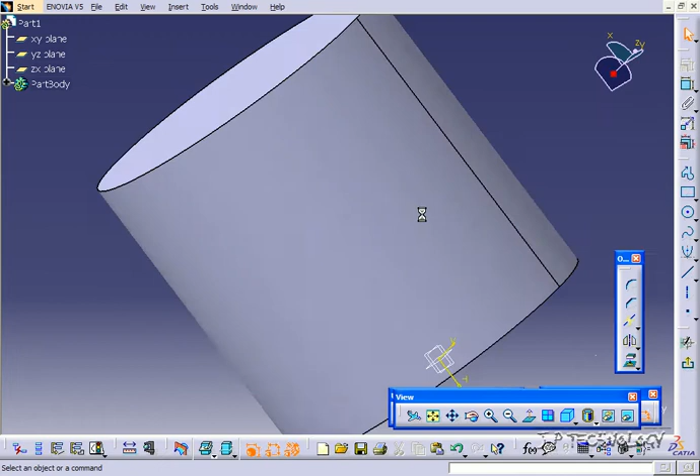So let's click on the ZX plane, and let's click Sketch. And what we're going to do is make our first sketch. So let's make a circle. Actually, first, what we should do is extract these edges. So click on an edge, click extract, and now we have edges at the two sides here. So now let's click circle and make it run across the middle here. So now let's draw a circle.

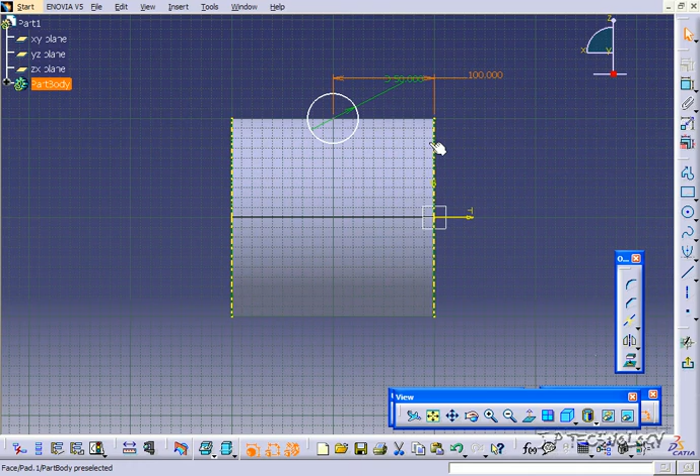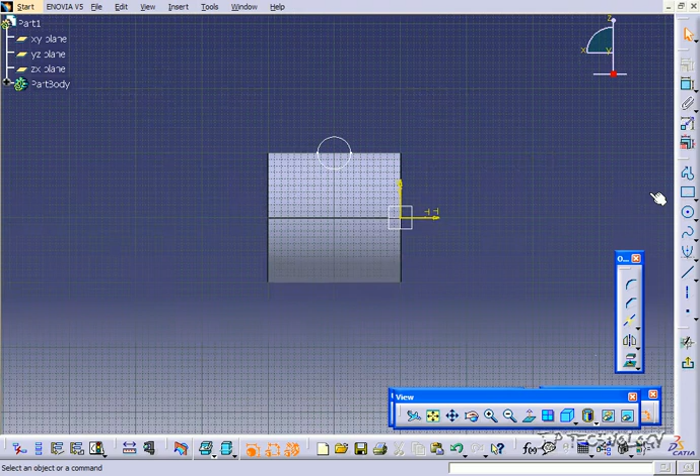Let's dimension this to 50. And from that end there, let's make it 100. So it's right in the middle. Now let's delete these lines we just made. And let's go out. So now we've created the profile that we're going to use for the groove. Now let's click the ZX plane again, click Sketch, and just draw a line down the middle of the cylinder.

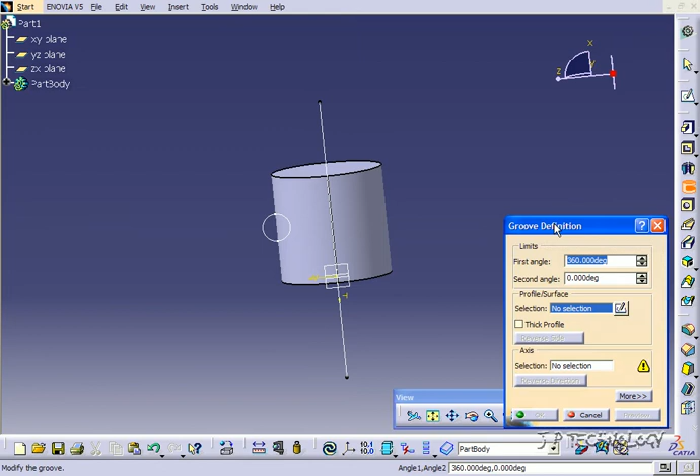And this is going to be the axis that we're going to rotate it around. So let's go up. And now we have our profile and our axis, and now we're able to use the groove tool. So let's click Groove, and we have the groove definition box here. So what it's going to ask for, like I said before, is the profile and then the axis. So let's click the profile we want, and then let's click the axis we want. And now it's going to give you a preview of what it's going to do.

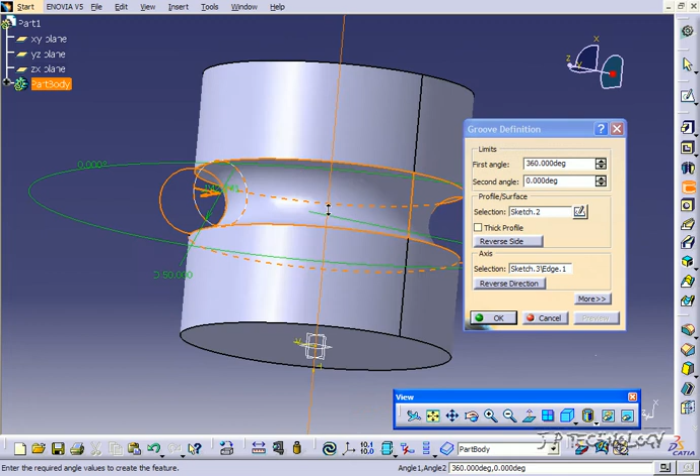So let's click preview and actually see it now. And it's going to cut all the way around with the circle. Let's click OK. And now we've made a groove around the cylinder. Now let's open the part body, double click on groove, and let's play around with a few of the parameters again. So like the other one, you have the first angle and the second angle.

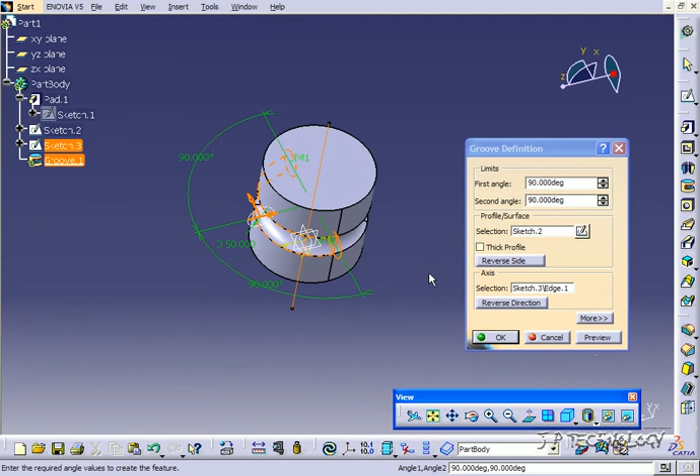So the first angle is going to be going one way, and the second angle is going to be going the other. So let's type in the first angle, 90, click preview, and you can see that it's going 90 degrees that way. And if we do 90 on the other way, click preview, it's going to do 90 degrees going the other direction. So let's click OK, and now we've gone halfway around. Now let's double click on the groove again, and let's make it go 360 for the first angle and 0 for the second.

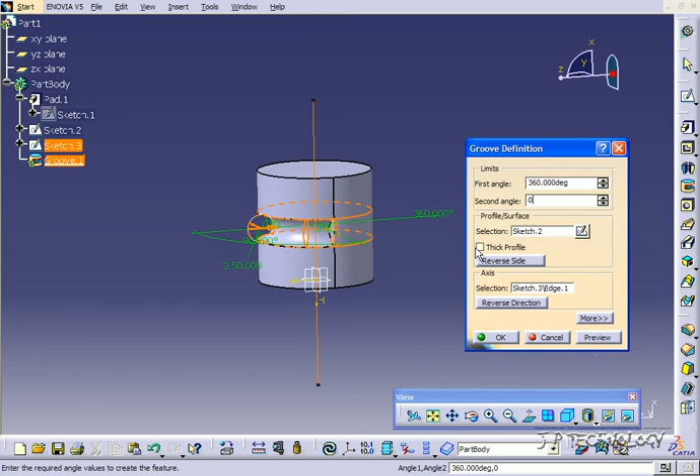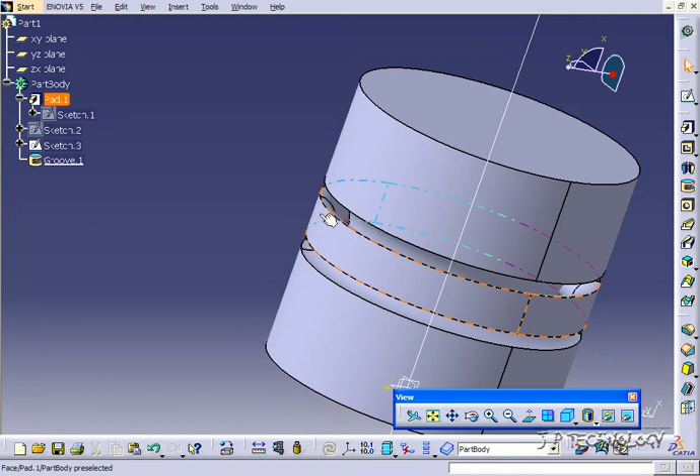And what we're going to do is create a thick profile. So let's click thick. And just like the other times, if you zoom into the sketch you made, you can see as you increase the thickness, it's going to increase the cut. So let's make this 10. Click OK. And now we can see that we've cut the groove around with the thickness tool with a thickness of 10.

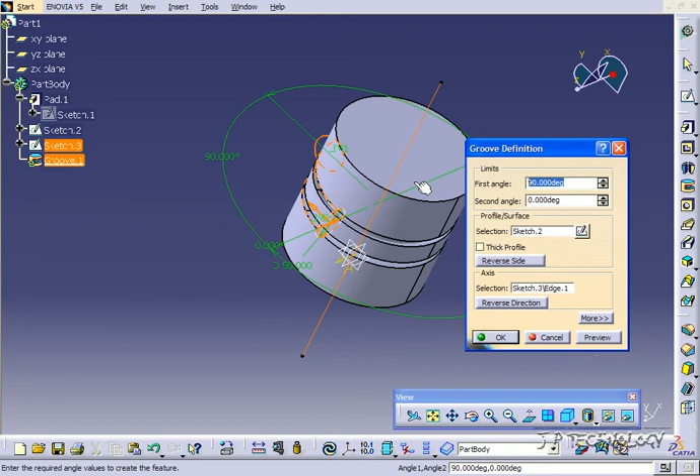Now let's go into it one more time, and let's take off thick, and let's put this to 90 and click preview, and you're able to reverse the direction. So let's reverse the direction, and all it's doing is changing the first angle, which side it's going to be on. Now let's make it do 360 again, and let's click OK.

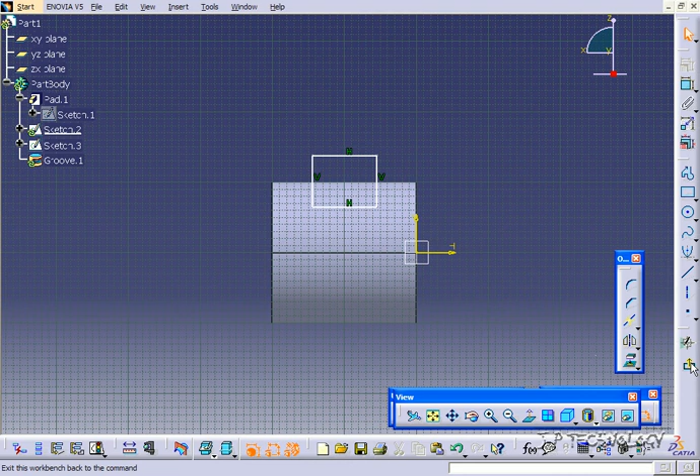Now let's click on Sketch 2, and let's double click on it, and this is our profile. So let's change our profile. Let's draw a square around it, and let's delete the circle. And when we go to click OK, it's going to rebuild, and we're going to have the square instead of the circle. And you can see that we have the square cutout groove all the way around rather than the circle.

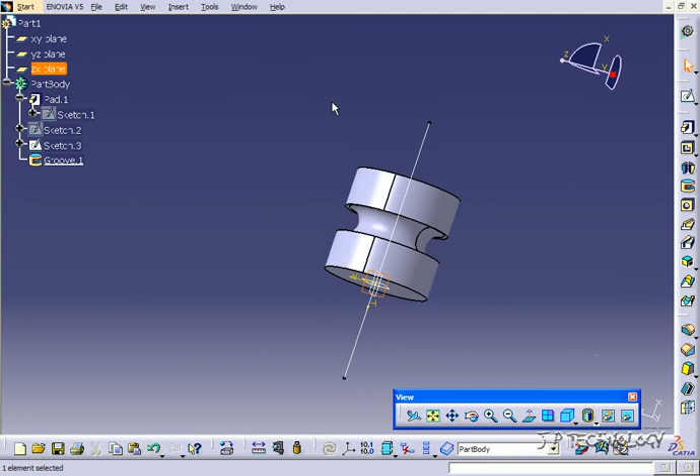Now let's go back into it, and we'll change this back to a circle now. And don't worry where you're putting the circle, just make one. Click OK, and now we got the circle back. Now let's click the ZX plane again, click Sketch, and this time let's put this axis on an angle. So from the starting point, draw it out, and let's click that line, click the plane there, and let's make this 5 degrees.

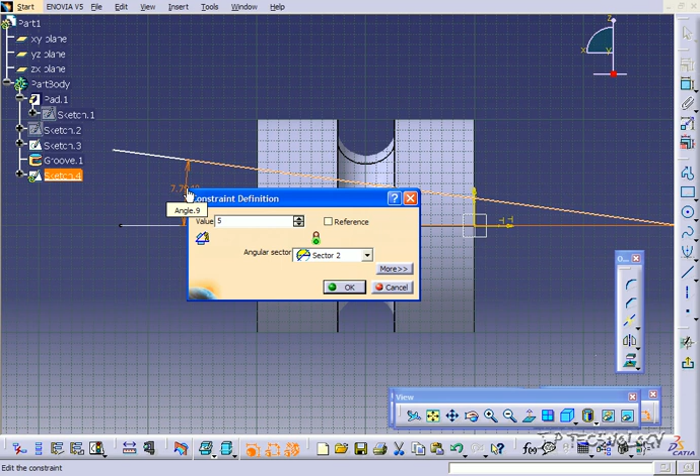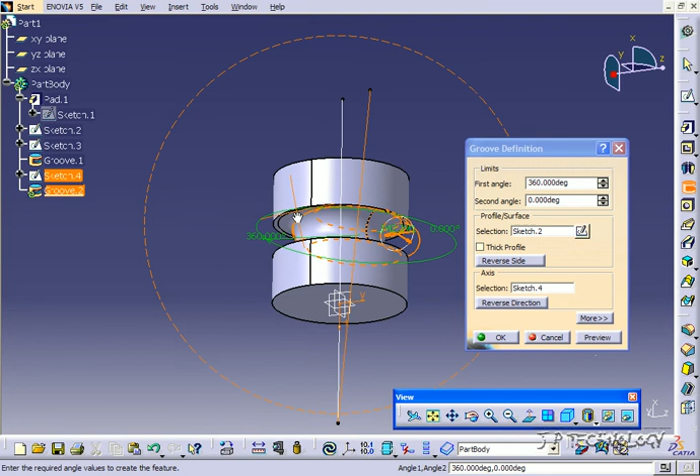Click OK, and let's go back, and now let's do a groove with that axis line rather than the original one. So let's click Groove, click Sketch 2 as a profile, click Sketch 4 as the axis, and you can see how it's going to wrap around. Now click Preview, and it's going to show you exactly where it's going to go. Click OK, and now we've cut into it with this axis.

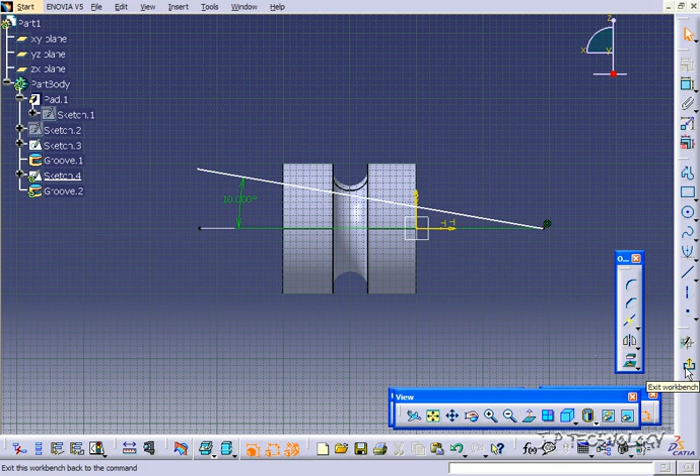Now if we go into the axis and change the angle, let's change it to 10, click OK, and now when we go back and rebuild it, it's going to rebuild it with that 10-degree angle. So again, it's changed a little bit more, the angle and the positioning of the groove.

So to use the groove tool, you have to have the profile and the axis, so you're able to change both independent from each other, and when they come together, they're going to give you a different result each time. And that concludes our tutorial on how to use the groove feature within Catia V5.